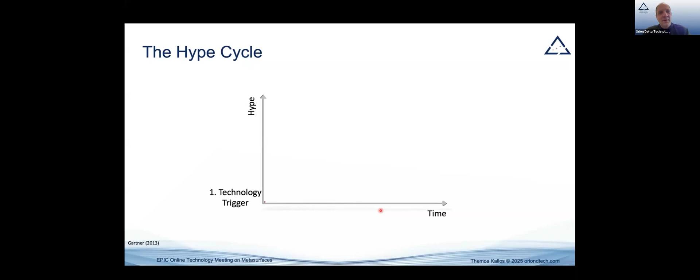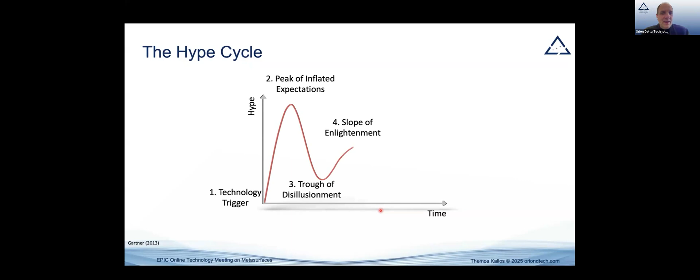There are usually five stages. There's a technology trigger that creates a spark. Then there's the peak of inflated expectations about what you can do with the technology. This usually dies down, and there's a trough of disillusionment. Things gradually pick up again with the slope of enlightenment, and then you reach a plateau of productivity, which is usually lower than the peak was.

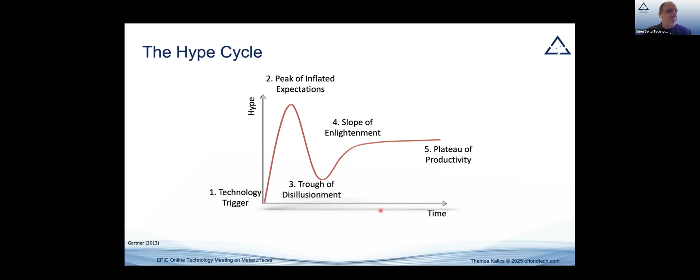I'm going to show you how that looked for metamaterials at the time. Before I do that, just a couple of words about what we do.

Orion Delta Technologies is an SME based in the UK, founded only last year. There was a team previously with Meta Materials Inc., a NASDAQ-listed company with over 200 people working on metamaterial applications, that unfortunately had to shut down operations last year. So we've picked up some of the technology and know-how and are continuing the effort.

This brings us to about 50 or more years of commercial expertise in developing and manufacturing transparent meshes, metamaterials, and in general structured functional films, which includes metasurfaces.

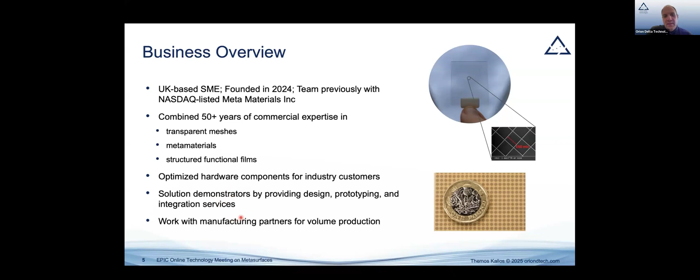We do more than optics in terms of the frequency range. In general, we develop optimized hardware components for various OEMs, and these include primarily building demonstrators, design, prototyping, integration, and then we work externally with manufacturing partners for volume production.

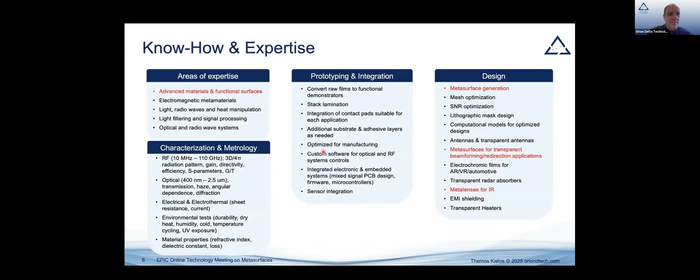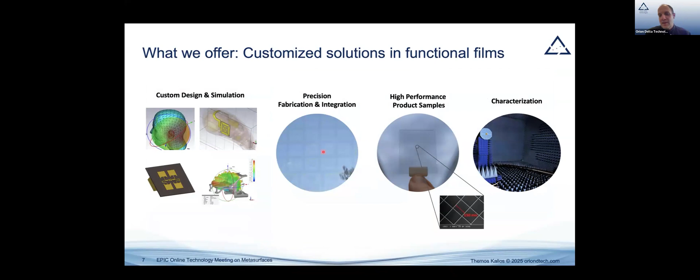I'm not going to go through all the expertise, but I marked in red quickly to show that we're also quite good at metasurface design and fabrication. We cover the typical design, simulation, prototyping, integration, sampling, and characterization in-house.

Now, coming back to the topic of metasurfaces - 10 years ago, I presented what I thought was at the time the hype cycle for metamaterials. What this looked like was: left-handed media was the technology trigger in the 1990s, with a negative refractive index.

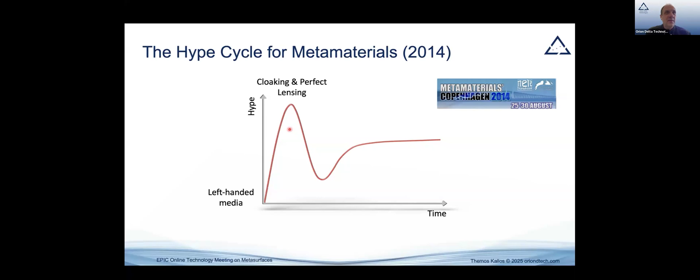Then about 10 years later, in the mid-2000s, with the work of John Pendry and David Smith, we had the cloaking and perfect lensing applications. This did create a lot of hype and brought many researchers and interested parties into the field. Very quickly, within a few years, this died down because it was very difficult to scale up these ideas and the losses were just too large.

And in 2014, I proposed that metasurfaces, which at the time were just coming around, would be the future of the metamaterial field, and this would lead us to commercial applications.

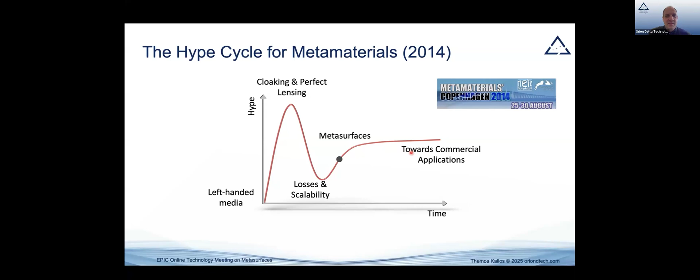So for the remainder of this talk, I would like to explore some of these commercial applications that have come about, with 10-year hindsight, and I think it's been quite successful. I'm going to bring some examples from the industry, but also metasurfaces we've developed ourselves.

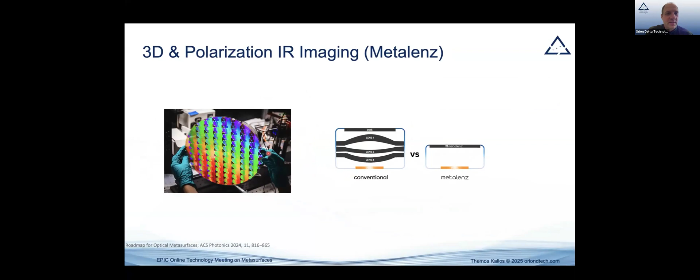Obviously there's Metalenz, which I think is the most popular commercial application of optical metasurfaces, where they've managed to replace multiple lenses and diffractive elements with a single structure. This is used for polarization and infrared imaging.

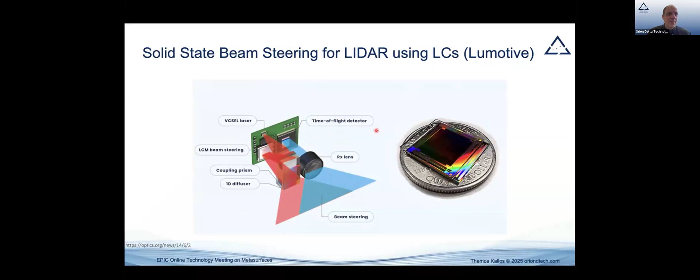Lumotive is also doing very good work. They've integrated metasurfaces for LiDAR, and they also include liquid crystal for some tunability. The difficulty in such products is that the metasurface metamaterial is just one component, but you actually need to build the whole system to demonstrate to the end customers that this is something useful.

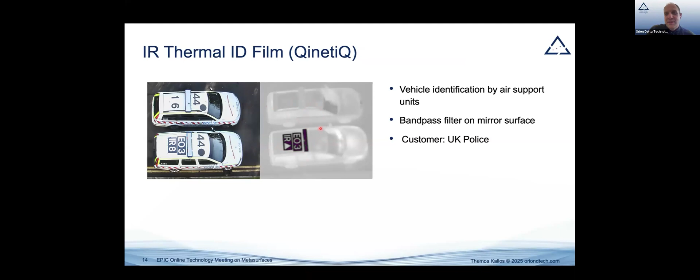Another example, from the UK, from QinetiQ, is a film that has an infrared signature. The purpose here is that when helicopters are chasing vehicles with an infrared camera at night, it's not easy to distinguish police vehicles from the perpetrators. But by adding this film to police vehicles, at night you're able to tell which car is which. That's a very interesting practical application.

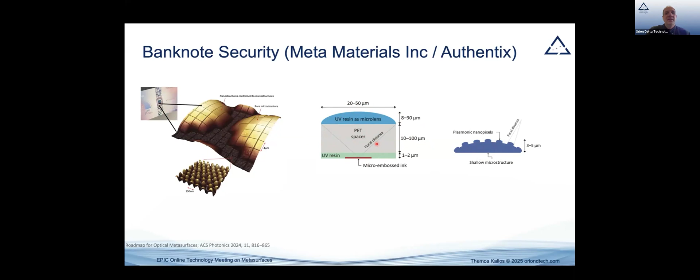Some of the work done at Metamaterials, since acquired by Authentix, is on banknote security. The idea there was to create plasmonic metasurfaces on microstructures that produce diffraction effects, coloration, motion, and other structures good for authenticating banknotes and other security products. The benefit is that you're able to replace the traditional micro lens with a plasmonic nanostructure - much more compact and with a much higher degree of flexibility with regards to what kind of effect you can achieve.

Now moving on to stuff that we are working on currently, we have transparent metallic metasurface antennas, and one example is using these antennas as heaters and communication elements in LiDAR.

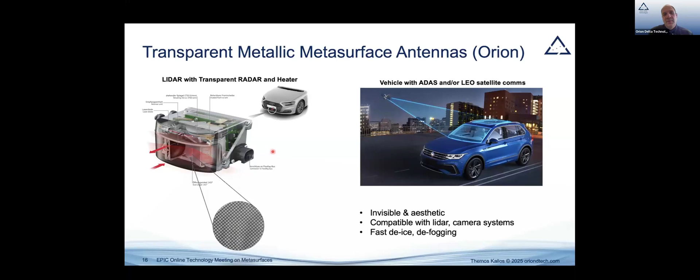The optics part of the application here is that you want to mitigate diffraction that inadvertently comes in when you try to install any kind of grating or surface in front of an optical component. So there are techniques here you can use to mitigate this diffraction so that the LiDAR sensor can operate efficiently.

So the idea here is that you use a metasurface made not out of nanoimprint, but out of a hologram. And this allows you to basically create masters that are much cheaper, and then you can create individualized masters at a reasonable cost so that you can mix and match each person with the reflective and optical combiner that's best for them.

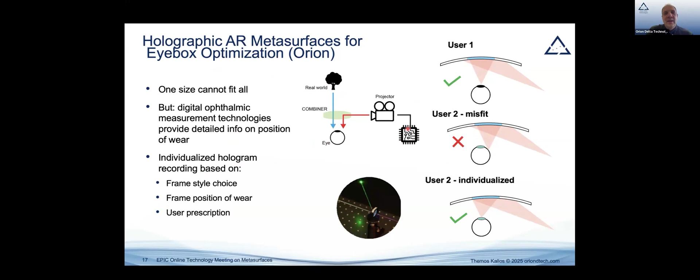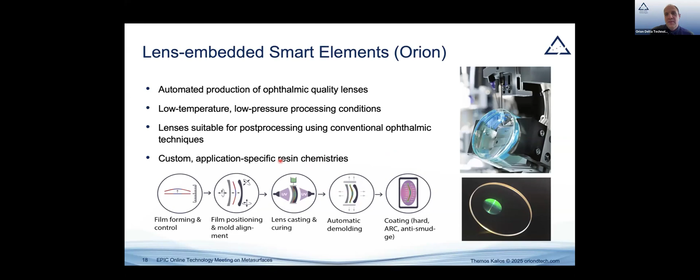In combination with this technology, there is capability to integrate this inside lenses instead of on top of lenses. You can cast a lens around your optical combiner element, and this allows you to do conventional post-processing with all the ophthalmic techniques, without having to worry about a very sensitive metasurface element that you have to protect.

So that's my quick round trip of applications, and I'll close off with outlook, what I've seen in the last few years and where things are going. So a couple of points.

There is definitely a shift from bulk metamaterials to surface metamaterials and metasurfaces. This is maturing, especially for infrared applications where they're a bit more forgiving in imperfections.

The companies that are very successful have managed to leverage CMOS foundries. This is very important, but still, the costs must reduce. As a starting point, if you're starting in this space, you need to be able to produce an element, I would say, less than $1 per square centimeter in terms of surface area. There's obviously a lot of variation, but that's roughly the order of magnitude you should be looking at.

This means there are more manufacturing advancements required, and as everyone here agrees, especially for the visible frequency range, this is still a bit of a challenge, and I think it will remain a hot topic for the next 5 to 10 years.

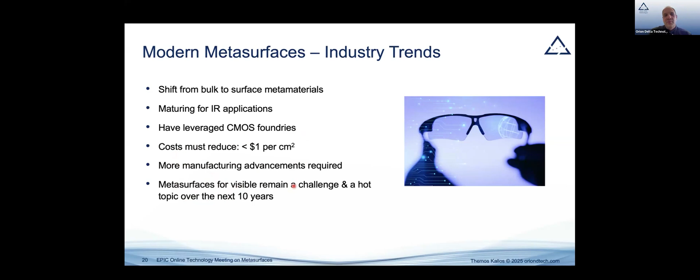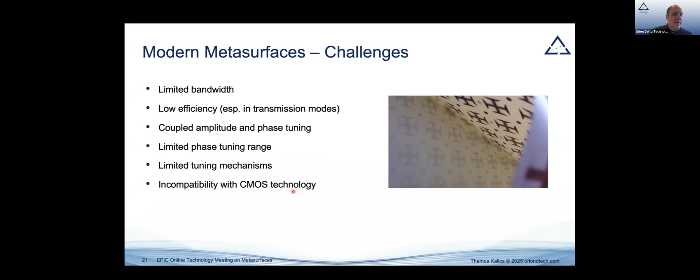And with that, thank you for your attention, and I'm open for questions.